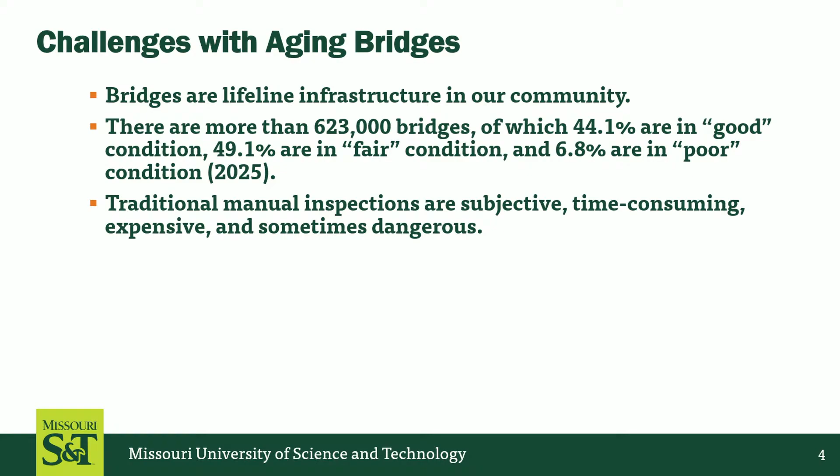I think all of you know the current state of the National Bridge Inventory. We have over 600,000 bridges, but most of them are in fair condition, with some percentage nationwide in poor condition. This means we have to watch this aging infrastructure more closely than when they were new.

Of course, current visual inspection is relatively subjective - even with rigorous inspector training, you'll end up with different results when they inspect the same thing. Even for the simplest bridge, a single span, a Federal Highway Administration study showed you get a pretty diverse range of different answers. So if you use machines, obviously it will give you consistent results in that sense. Instead of climbing around, using a drone is certainly more appealing in the future.

So why do we need automation in civil engineering? I put together 4 reasons. One is physical accessibility. As you can see from the picture, we need a boom truck to access different parts for inspection.

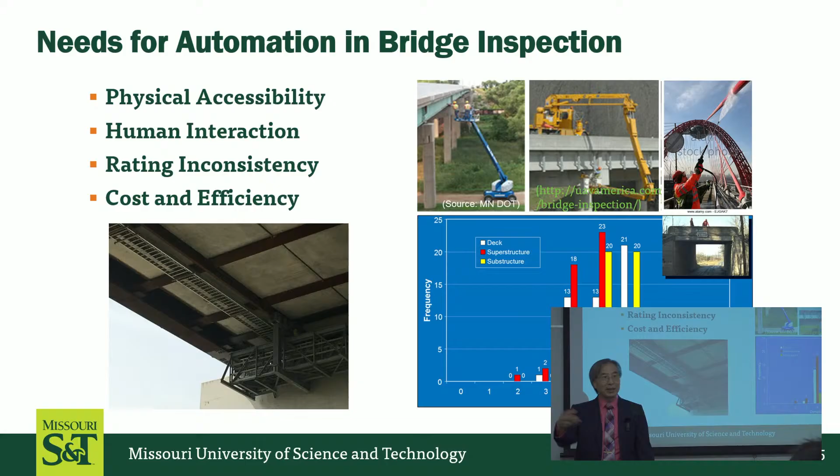In addition, the inspection guidelines require human interaction with a bridge element, in some cases within half-meter distance, because they need to clean the surface or tap around the member to hear it. Sometimes you need that sound to distinguish one potential defect from another. So we need that interaction going on. Within a drone itself, you cannot interact with the infrastructure - that definitely cannot meet the federal regulation if it requires human interaction.

Certainly rating inconsistency - you can see that - and cost efficiency, this picture tells you everything. This is a bridge over the Mississippi River. Underneath this bridge, they built an inspection platform. Mike from Washington knows that very well. For major river crossings, oftentimes you provide that inspection platform because for future inspection and maintenance you need it. It costs $1 million to build this platform itself.

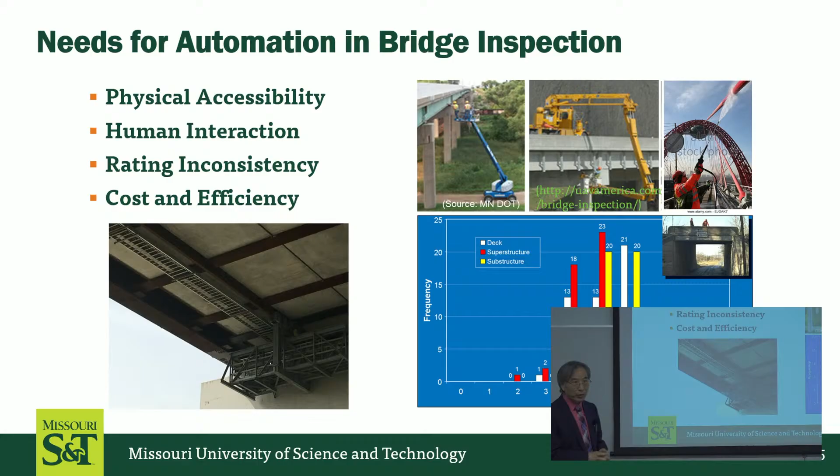And I was joking with Missouri DOT, if they give me $1 million, I'll provide all the robots they need for the entire state's bridge inspection. They don't need to maintain this platform either over time, and they don't have to spend money. So if you do it right, a robotic solution will be very efficient, effective, and cost effective.

So of course we do have a sort of bible for bridge inspection, the 2019 bridge element inspection manual, where all elements are required to have a 4-condition-state assessment reporting. And if you check this definition, it often adds quantifiable data - spall 1 inch or less deep, or 6 inch or less diameter. Using visual inspection and looking at a certain distance, it's very hard to get those quantified data. So if you have a robot interact with the bridge, it's a lot easier to get a consistent result. So all this quantified data - you can guess, but it's hard to get the decent number to fulfill the requirement of this regulation.

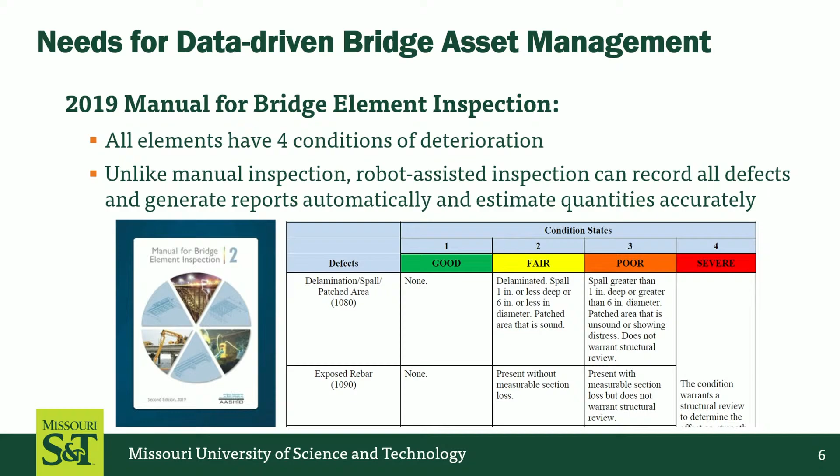So of course there's another issue with manual inspection. Even recording all this information from one bridge itself is also an effort. Manual recording is a significant effort, especially for bridges where you have difficult to access areas. It will be awkward for you to even record things on the way, if you have to climb somewhere on the bridge. So all this, if you can generate it with a machine, you can automate the process. It will be very efficient.

So our solution is automated inspection, mainly 4 steps: data collection, defect detection, quantification, and condition assessment. We will go through each step in this presentation, but I encourage you to ask questions so I can always elaborate more when there are unclear remarks.

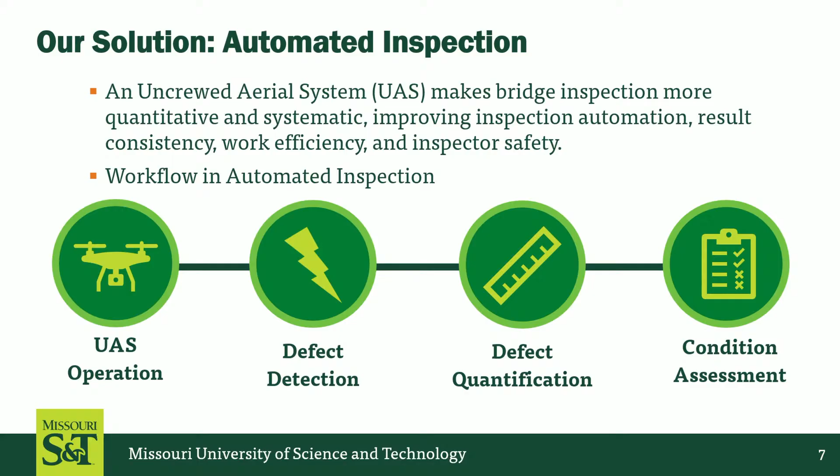So obviously we will use an unmanned aerial system, combining drone, climbing robot, and sensing system to make the inspection more quantitative and systematic in that sense. We can improve not only automation but also safety for the inspector, because you are working on the ground instead of climbing or hanging somewhere on the bridge itself. So that's the difference for an automated solution.

Again, to give you a little more detail for each step, you can easily understand the different steps. These are 3 steps, and step 4 is the key part of this presentation. Basically it's easy to understand: using UAS to collect data, then automatically extracting video frames using AI, and then segmenting both bridge element and defect using multitask machine learning.

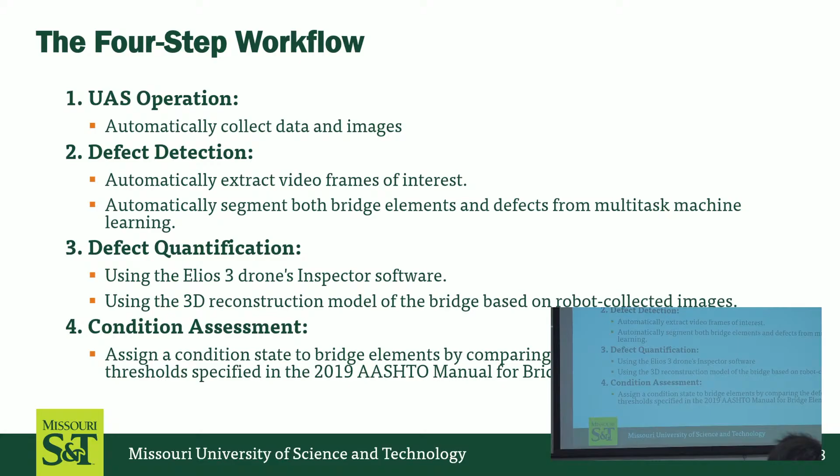Because when you're using a drone or our robot, you collect tons of video and data. Asking engineers to sit in front of a computer and sift through those images is impossible, and it's also very boring - not a good use of time. So instead, this is a perfect opportunity to ask AI to pick out, let's say, 50 to 100 frames from 2 or 3 hours of video, so the engineer can only evaluate those 50 or 100 frames for interesting features. That would be ideal. In that case, the AI doesn't have to provide very accurate results, as long as it picks up the most interesting part for the engineer to review. That's a good use of AI for that.

And then to quantify that, obviously, this is another part. Using visual inspection, it is very difficult to quantify them, especially with remote access. So using the digital technology, we can quantify the dimension and the size of a defect. It's relatively easy. Sometimes you have to do 3D reconstruction, which takes some effort, but typically, once you develop a 3D model, you do not have to redo that every time. So you just need to do that once, for example.

And then, of course, we will compare whatever image we collect with the 2019 manual for bridge element inspection, and we can use graphical comparison or other comparison to determine the condition state much better than just a human looking at the bridge and saying condition state 3 or 4. Because you can quantify the correlation between what you see on the actual bridge and what people put into the guideline as a reference.

By talking about that, there's also an opportunity. We can also evaluate whether the images put in the 2019 manual are reasonable or not. Because those are picked in an ad hoc, sort of arbitrary way, they may not be so scientific, even though we put the category 1, 2, 3, 4.

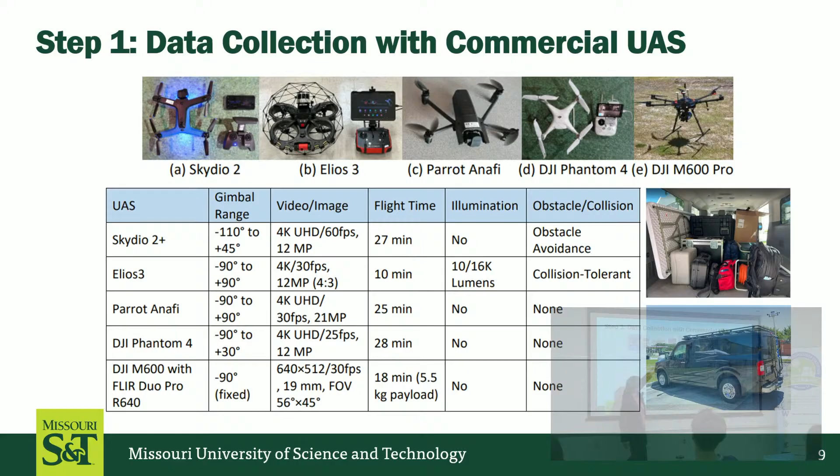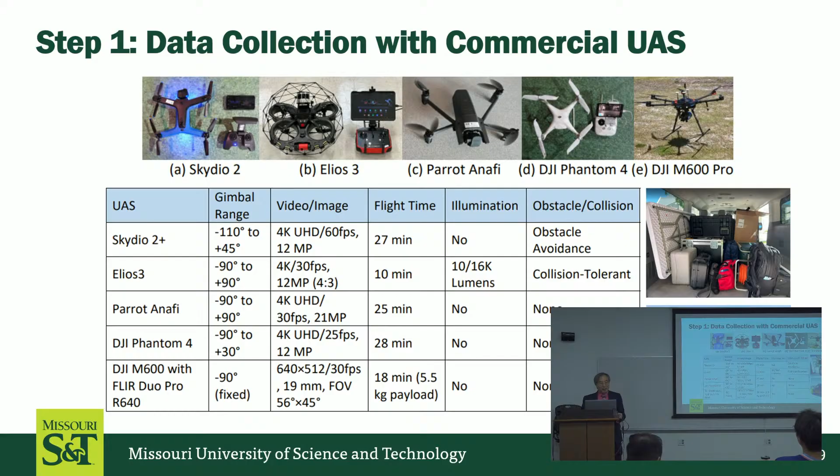So we also have a set of commercial drones we acquired, and the last one we actually developed specifically and then asked a vendor to build for us only. So we have a suite of commercial drones. These are nothing new, but we use the Skydio 2 and the Elios 3 quite a bit. This is made in the US, and that's made in Europe, in Switzerland, I think. We use the DJI drone quite a bit as well, but since last year, we began to use the DJI drone less and less because some clients specifically ask us not to use the DJI drone.

But we focus on our own robot system. As I said, the commercial drone does not give you an interactive feature with the bridges. And some of this feature interaction with a human hand is required in future inspection. So the only way we can satisfy the federal regulation is to create a robot that enables us to interact with the bridge directly. And we do that in two senses. I'm going to jump into this one first.

For example, this drone can fly underneath the bridge girder, grab the girder, and then just hang on there like a driving vehicle. I'll show you a video very soon. Once you engage with the girder, this is no longer a flying vehicle. You can turn off the propeller and then just move, traverse linearly.

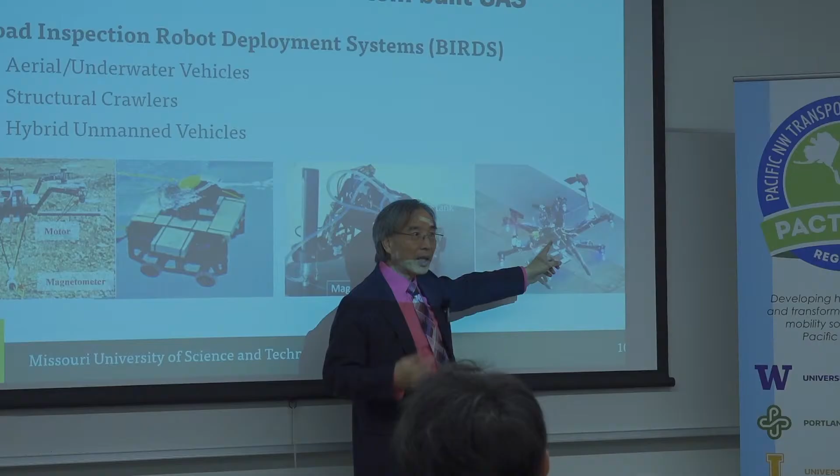So when you do that, there's a lot of benefit. The most important benefit is that it's no longer like a commercial drone flying around. You will sometimes be moving around because of wind or whatever reason, or the illumination light condition is not consistent. You have a shadow, you have others. Once you engage here, all those problems are gone. So the data we collect is very, very high quality and consistent.

But more importantly, this guy can carry a palm-sized crawler, like this one. Once you engage on the girder, it can launch this one onto the girder, and this guy can move around on the surface of a structural member to inspect corroded areas, connection areas, bolts, or whatever other feature you are interested in. So together they can cover almost every area you are interested to inspect. That's the purpose.

And this can do not only visual inspection using a camera, but also non-destructive testing. This is an ultrasonic velocity tester for metal thickness measurement. And this is a probe. We also have a fully submerged underwater robot, an ROV. We also have a surface water vessel to carry sonar underneath to survey the bridge scour problem area as well.

And this is one where we developed our own drone with a magnetometer to communicate with the so-called smart rock. The concept of smart rock is a sensor put inside a concrete ball, and you deploy this concrete ball near the bridge pier where bridge scour is potentially happening. As the scour happens, creating a hole more and more, this smart rock will roll into the bottom of the hole. By communicating from the drone, like 5 or 6 feet above water, with the smart rock, we can identify the location of the smart rock in real time, even during flood season, when you cannot send a diver to do any inspection.

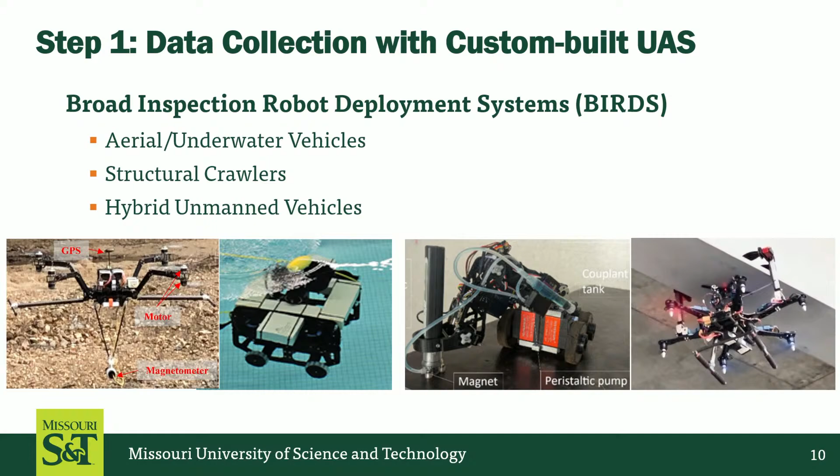We can use this. In 10 minutes, we can collect all the data we need to assess whether your scour hole is increasing or not. And that data is very critical for DOT to make a decision during the flood season, for example. So we do have a combination of aerial underwater vehicle, structure crawler, and the hybrid vehicle. And I'm going to show you some video pretty soon.

Luckily, like Professor Wang mentioned, we won the 2025 ASCE Charles Pankow Award for Innovation for this one. And they quote, "This is truly revolutionizing bridge inspection in an automated way, leveraging AI and the drone technology." So you can see this is what we submitted to ASCE actually.

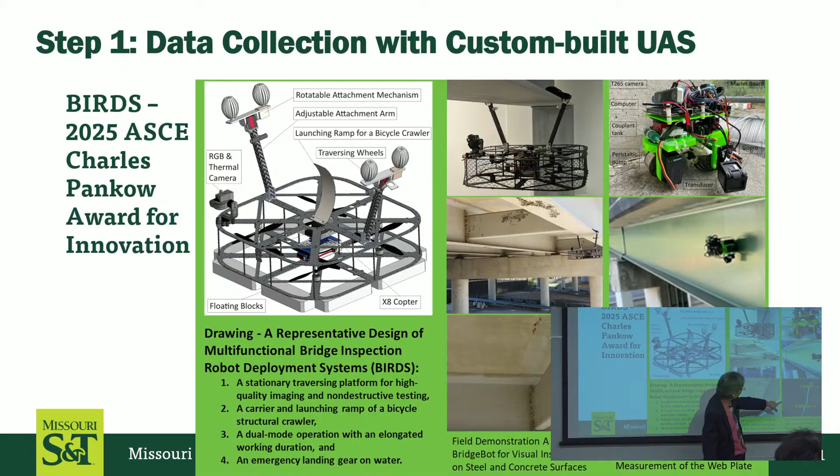This is the more finished product hanging, and then for this inspection, you can launch the crawler for this real in-service bridge. For inspection, you can automatically, in real time, display the thickness of the metal, like a girder web side, as the crawler is moving around. And you can also see visually the surface peeling of the coating area. And all this can be quantified in an automatic way.

And this is an image I just received yesterday. So I put that in. That's from the US DOT presentation I've been making, the impact of a robotic solution. Now, you may ask, why a hybrid robot? I summarize here: increasing operation time. Flying versus traversing, the consumption of battery power is in a different order. If I can fly 10 minutes, I can use that same power to traverse for more than 1 hour. So this will make these technologies more practical for real civil engineering inspection, using crawling and flying capability together.

Second one, as I mentioned, you can create a measurement station. It's very robust. Third one is easy navigation, because instead of flying 2D or 3D, we are moving in 1D basically. And we also get accurate positioning. If you are familiar with a surveying wheel, if you walk around, you can measure the distance from the beginning to wherever you are. We can use a low-tech surveying wheel to measure the distance from the end of a girder to wherever you are inspecting. That way it's easy for DOT to use. Forget about GIS and other referencing you have to learn. By saying the distance from Pier 3 to this inspection location is 20 feet, any bridge engineer will easily know that. So it's easy to connect with practice as well.

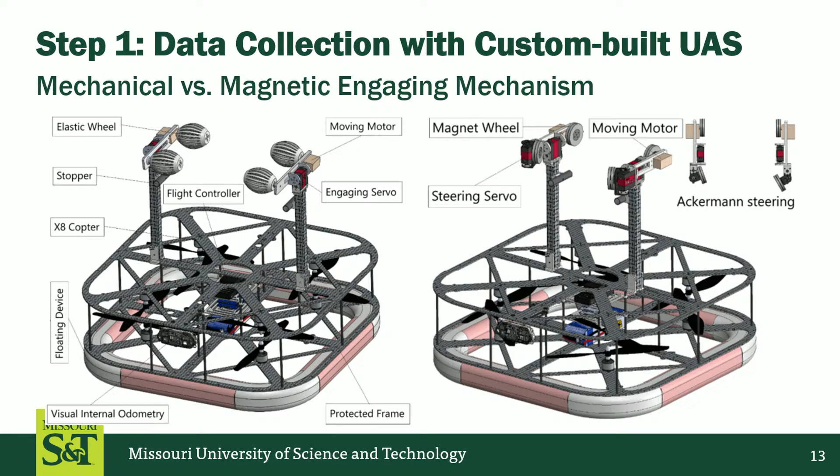These are the two mechanisms we created, mechanical and magnetic engaging mechanisms. The one I showed earlier in the picture is mechanical engagement. This is good for both concrete and steel girders. And this magnetic wheel is good for steel girders, obviously. I will show you a video pretty soon, but this is another summary of what you saw already. This is the initial standby position, this is operation, non-destructive testing, and this is the control system we have.

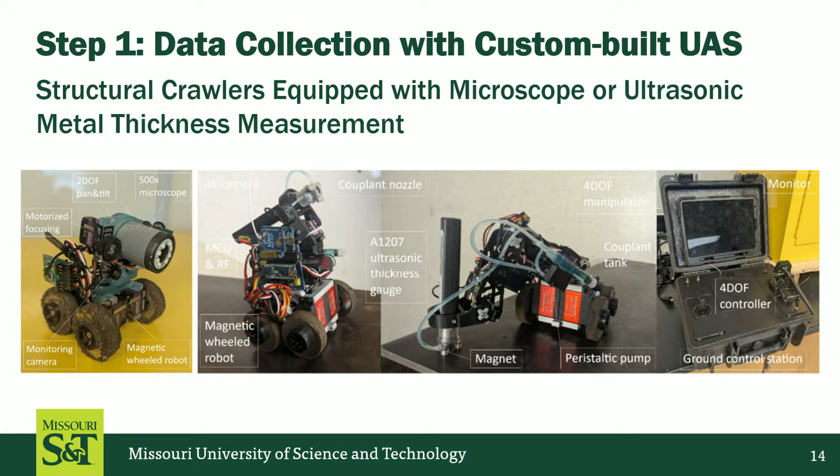And we also have another crawler using magnification, like a mini camera. You can magnify things 500 times, 1,000 times, so you can do visual inspection remotely, basically. If I give you the video, you will see. First of all, the engagement of the drone with the girder. This is a real bridge in the state of Missouri, flying to engage this girder at the bottom flange, and from there just moving around in one dimension. When you turn off the propeller, it can save a lot of power.

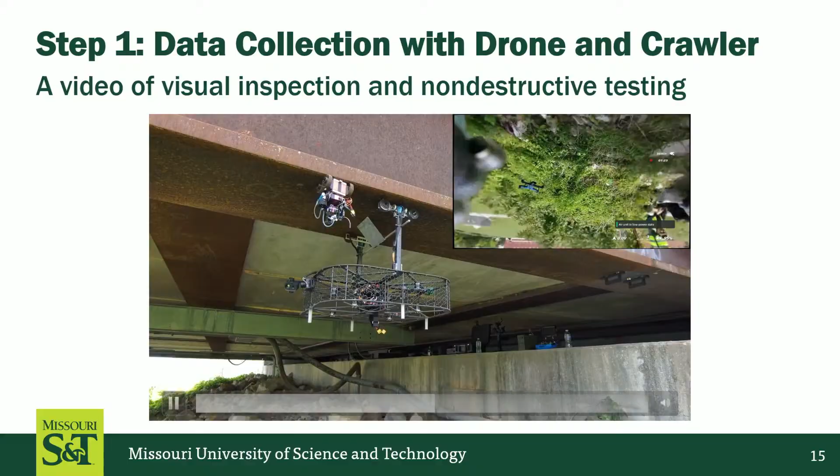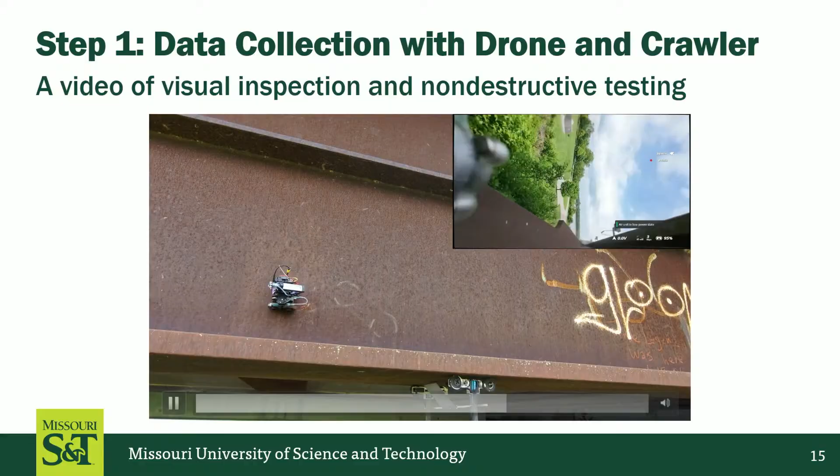The second one we tested on a river crossing bridge, a cable-stayed bridge. You see the launch of this crawler, and then you can see it moving around, and it can carry the camera. I'm using another Skydio 2 drone to shoot this video, so you can also see the Skydio 2 occasionally. You can move around to different parts of the bridge. If you are interested in collecting more data in a certain area, you can just move over there. And very soon you will launch the probe I was talking about to measure the thickness. This is ultrasonic technology. You can show directly on the screen whatever measurement you have, in real time as you go.

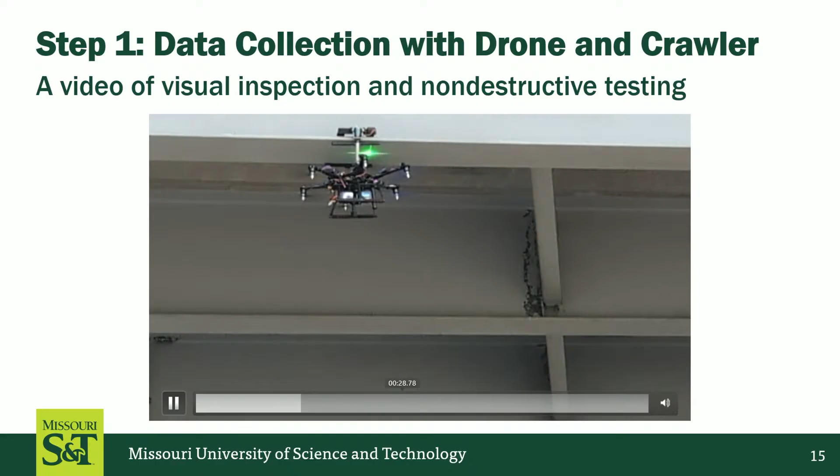So that's basically it, if you want to take a quick look again, because this is one of the unique capabilities we introduced. At the time we began to work on the bridge, this was the only one in the world that could do it, actually. So that's why we got the patent and the AAC award on this technology.

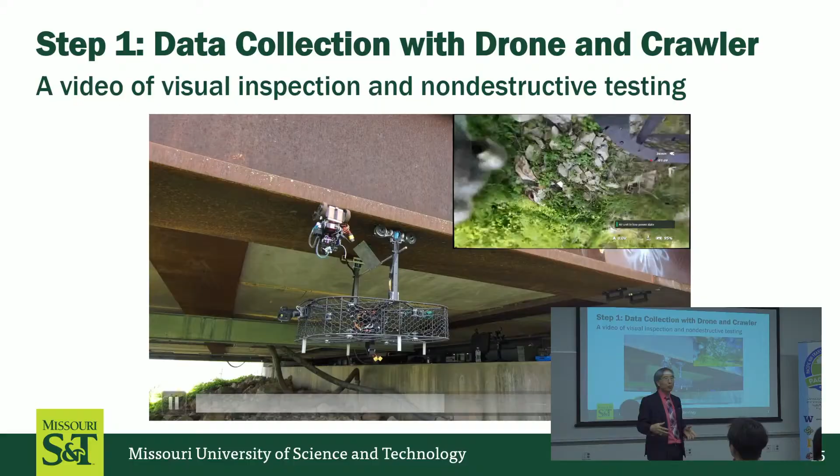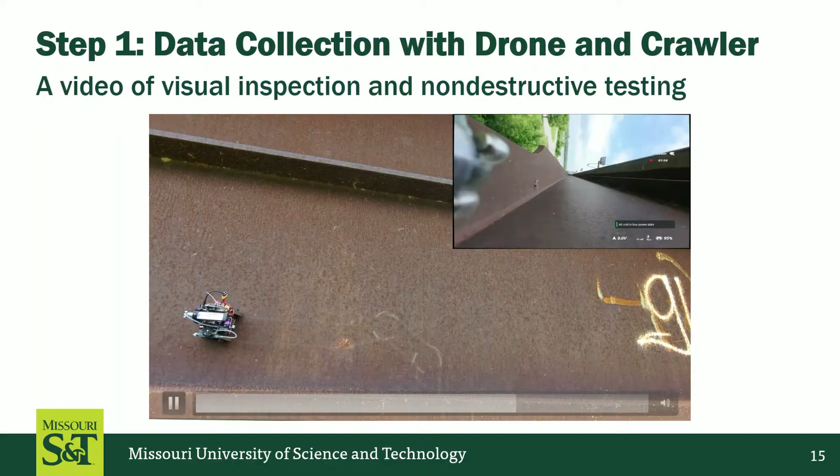So again, one of our goals is to push this technology for inspection of long span bridges. Because if it's crossing over water, it's a lot more challenging to inspect manually. And for these things, it doesn't make a lot of difference whether it's on land or over water. So it's very, very relevant to bridge inspection in this sense. So this one is showing the highway bridge and the river crossing bridge.

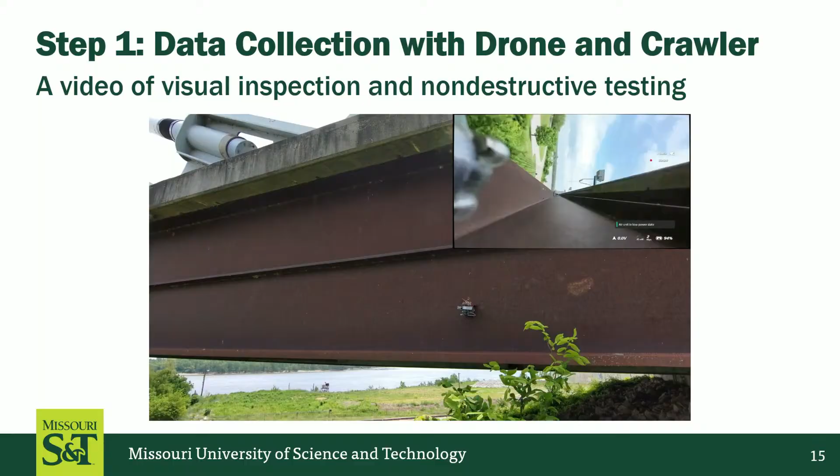Next, I also want to show you the real-time weld inspection capability as well. But before I do that, we're also involved in manual inspection on a real river crossing bridge. This is my team doing all this non-destructive testing manually on the pier. So in the future, we hope, and we are actually beginning to work on this, to create a water surface vessel that can do all this automatically instead of sending people to the middle of the river to do this.

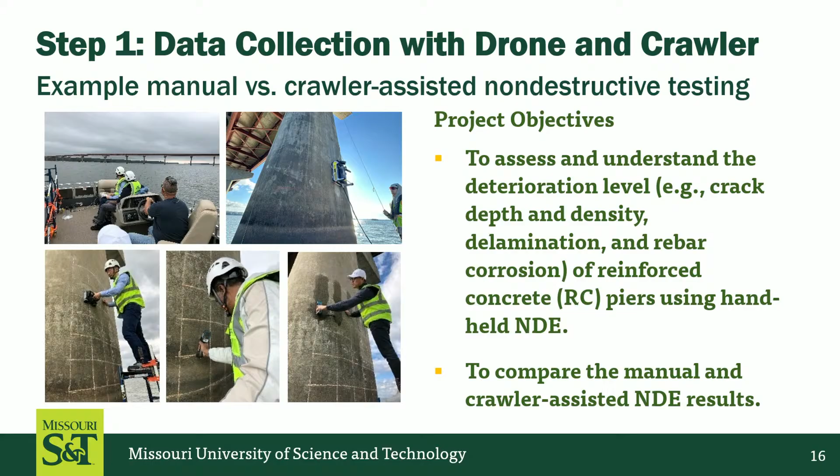As a matter of fact, the challenge is the water is always moving so much. So we have to take advantage of this control technology, and also create a creative way to make sure the non-destructive testing part is stable. Otherwise, you cannot get a nice measurement. So that's the experience we got from field operations with our clients.

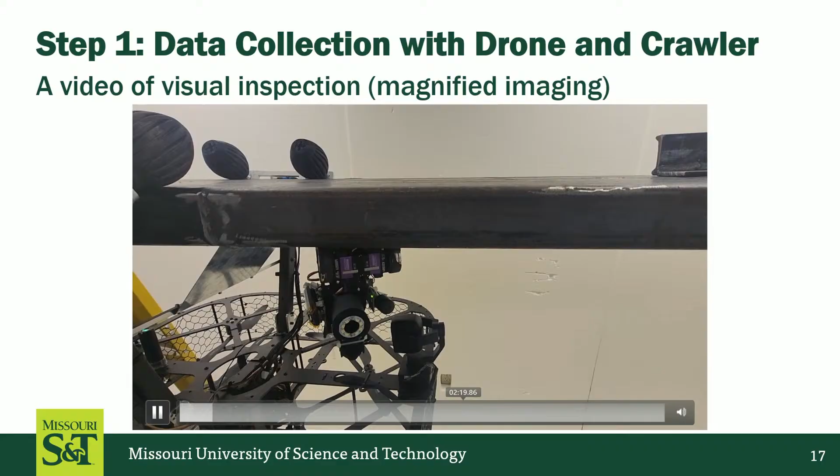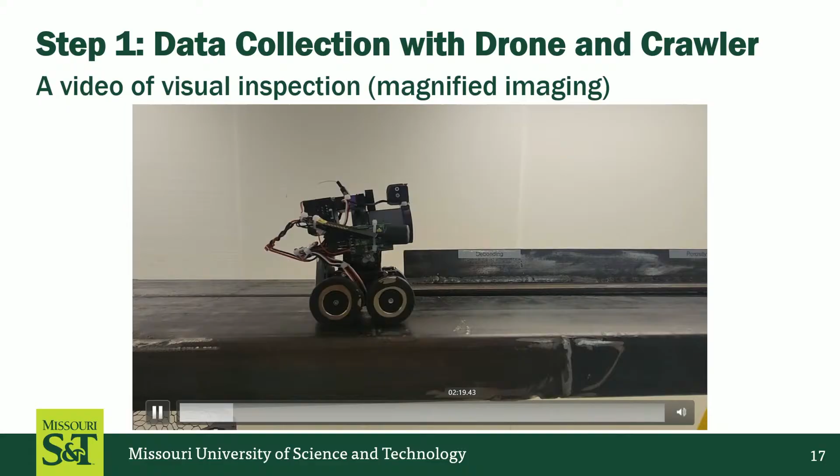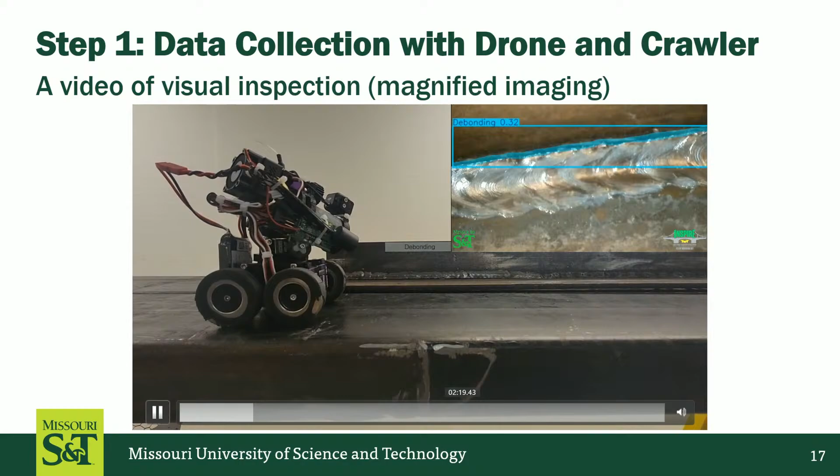So this video is showing weld flaw detection, and this is the demonstration in the lab with a metal structural member. It does take a little bit of momentum because the crawler has a certain weight, so you need to move at a little bit of speed to get over the gravity effect. You can see we have prepared the weld specimen. As it moves, it can provide real-time detection of weld cracking, debonding or cavity in the weld. And of course, there is a pre-trained AI built into the robot.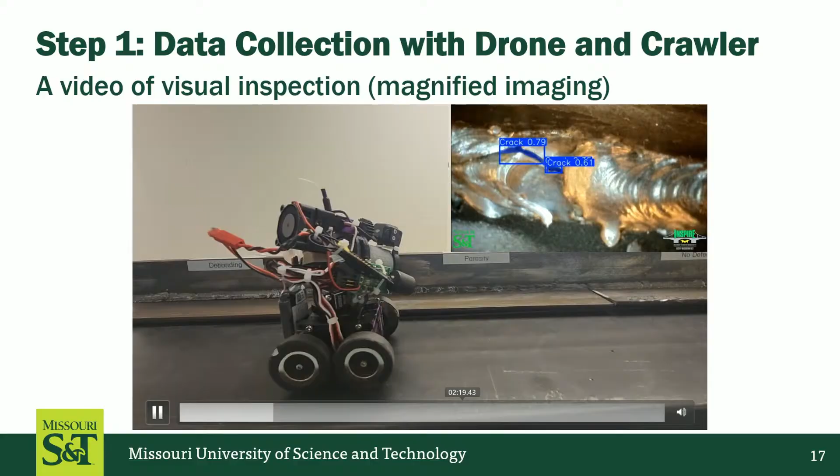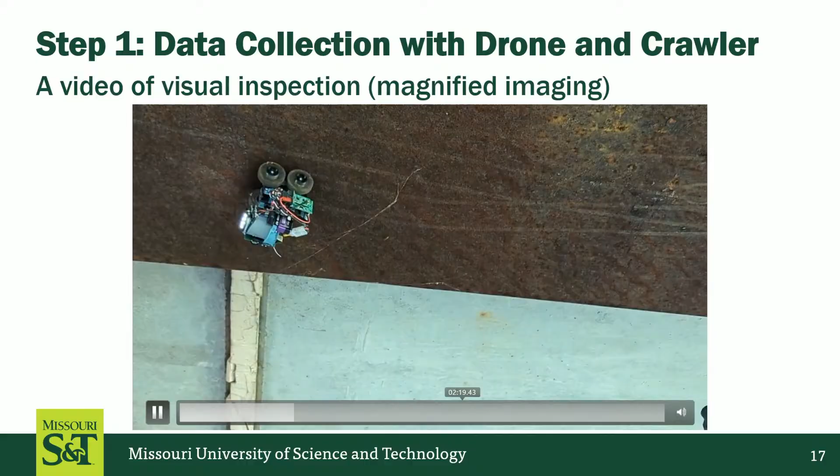So once you take a new image, it can automatically spit out. You have this is a crack at a confidence level of 79% or whatever you have. If you are working on AI, you know this is based on instance segmentation. You only have a confidence level. You do not have accuracy because you do not have ground truth to compare, right? So if you're working on that, you know that.

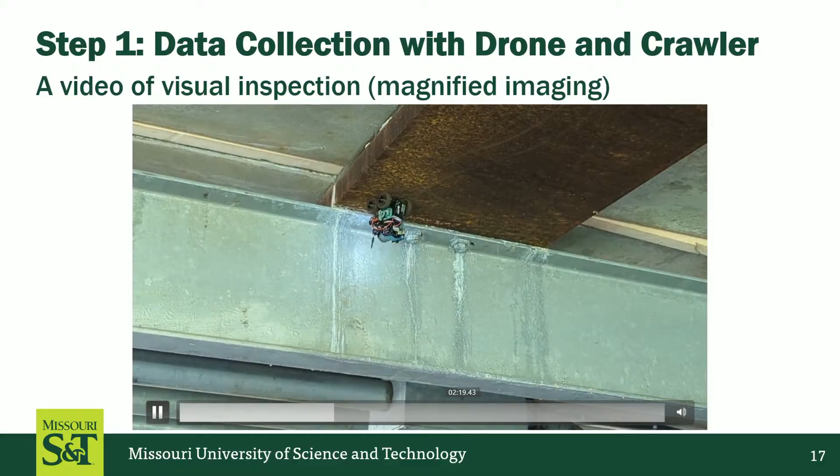And especially this capability is good in the crowded areas where you can never send people in. So this is a river crossing bridge at the anchorage area. There's no way you can send any engineer close by. But this guy can go anywhere. It'll show you in this video very soon, at the last part. And if you want to see if there is an egg in the bird nest, you can also see that using this.

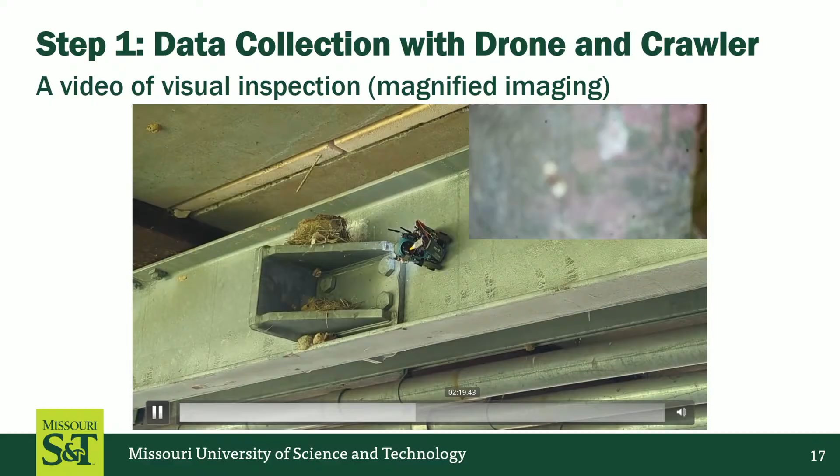So this technology itself is very good. Of course, it takes an engineer to plan the mission and do some meaningful task. These are just tools; AI and robots are all tools. So we have to make good use of them. And now I'm showing you some live feedback. You can see the fine grain of the texture on the surface. The camera we put on has a 500 times magnification factor, so you can see it in great detail.

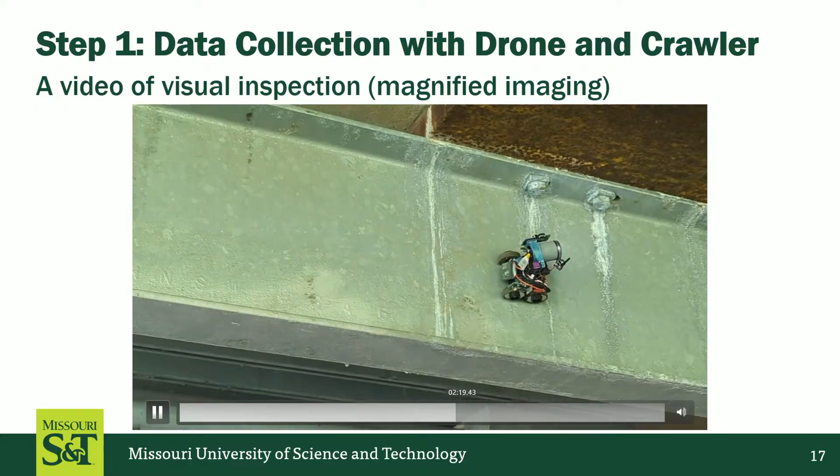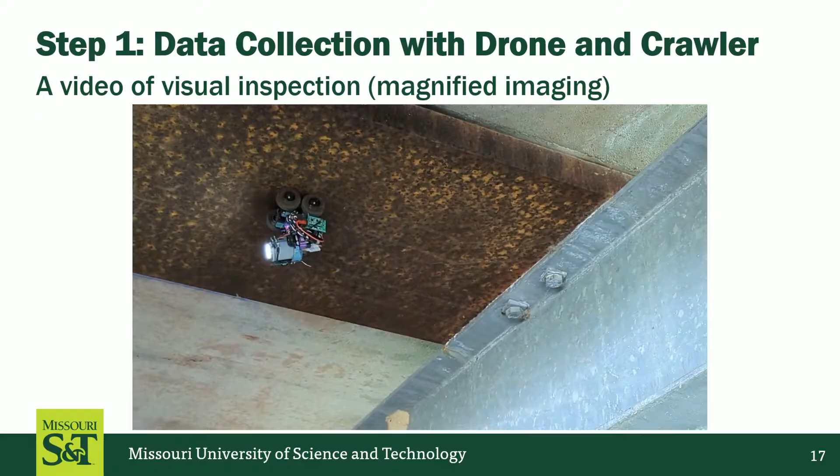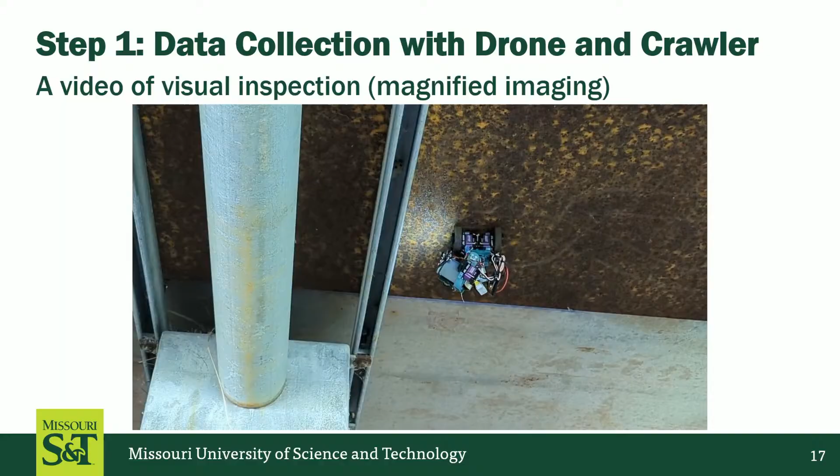So for PhD work, the value is not how to build this thing. The value is how to use the data, or planning the task and then using the data. That's the real value for PhD work. It took me, my research engineer and postdoc a lot of time to design this unique robot. But I never asked my PhD students to do that because they have a firm deadline for graduation. They have to publish papers, for example.

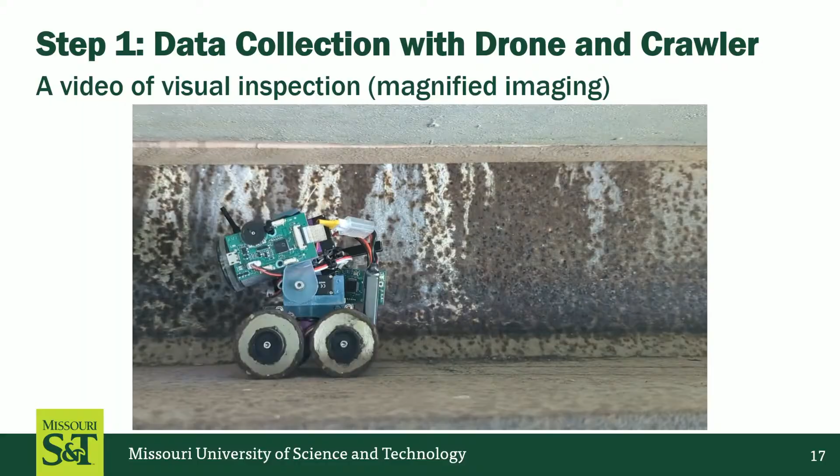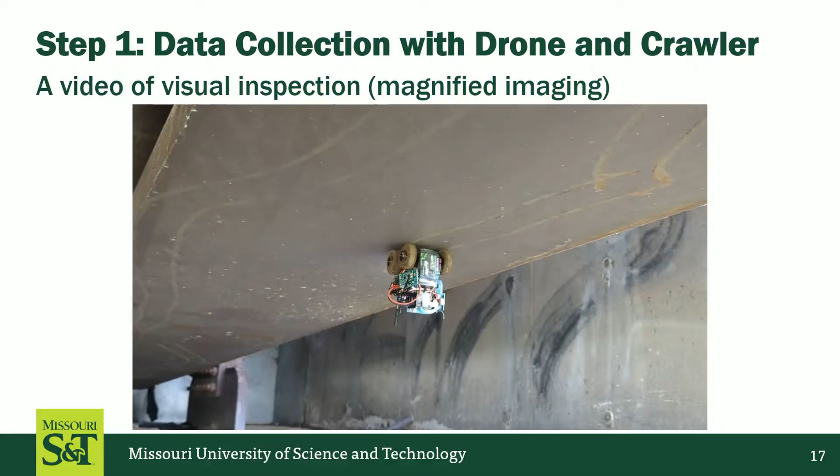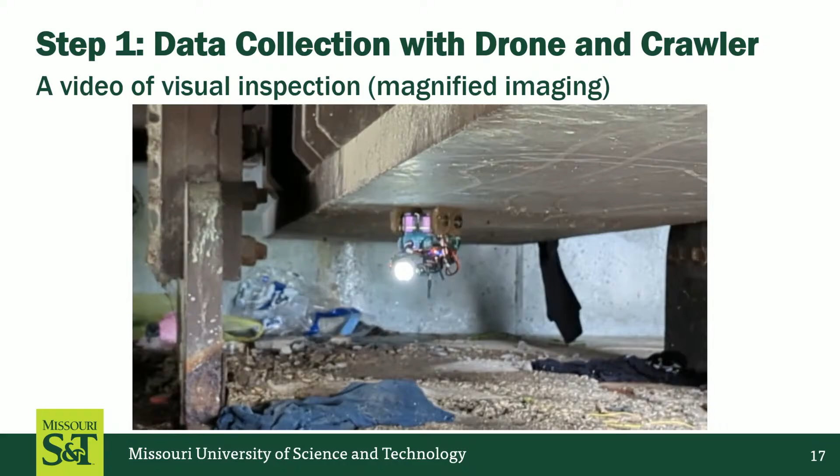So this is the retrieval of the crawler, and this is probably going to the anchorage area. You can see it's a very tiny space they are walking on, and to the anchorage area very soon. Yes, this is going to the anchorage area. You can see it's actually a tiny space over there, and it's all kind of a jungle. But this guy can go anywhere, even between two stiffeners over here, where you can never see. It can send back real-time images, actually.

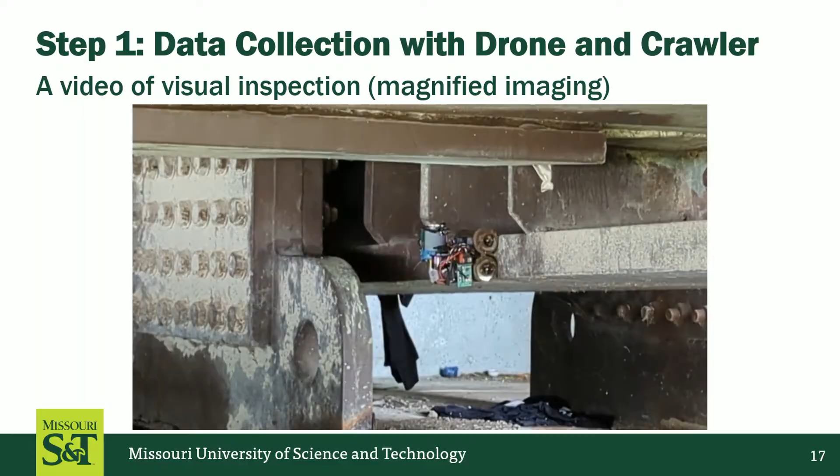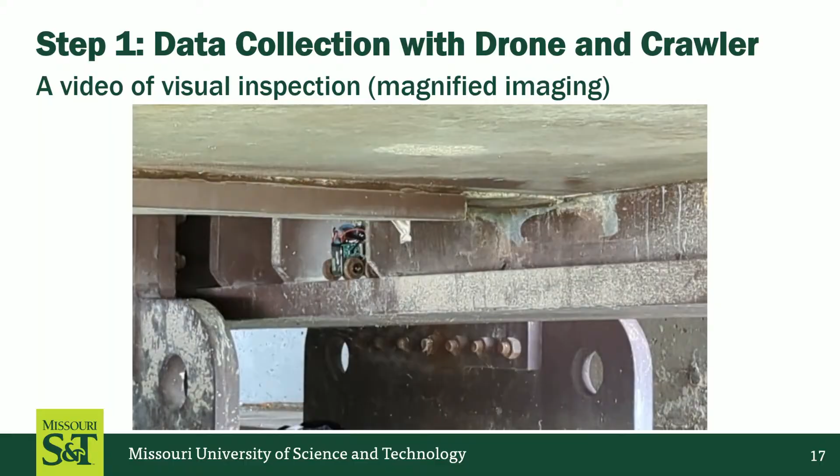See, it goes between the stiffener. So you cannot see the crawler itself visually even. So we basically demonstrate this really nice tool for us.

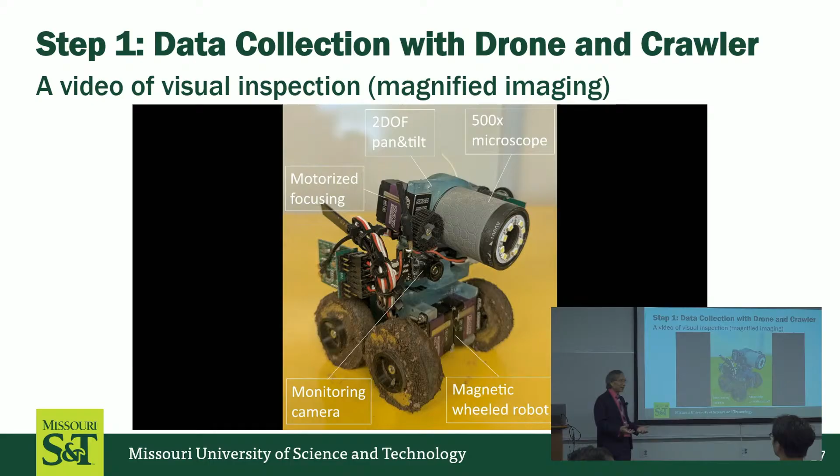How do you control it at that point? What's controlling it so that you can get it in between the two stiffeners? Have you ever played a video game? No, this is just like a video game. I'm sure your kids will play this one, operate this very much. Okay, so you've got a camera and you're just controlling the video game basically.

Okay, yeah, we have a feedback, live feed of the video.

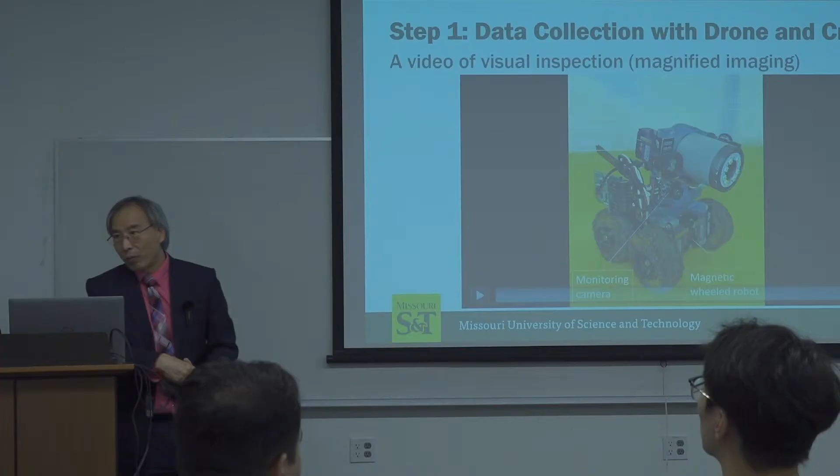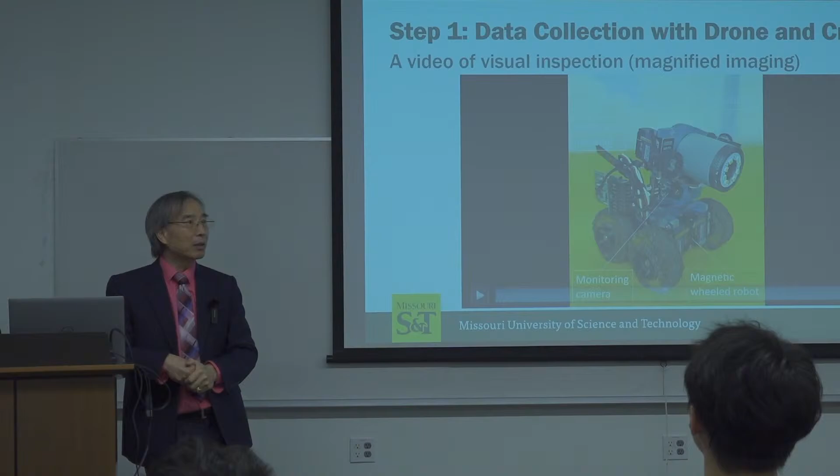So what's the communication range? We didn't test to quantify that yet, but typically within 1 kilometer is not a problem. We haven't tested the extreme maximum distance yet. That's something I hope we will test on the real application case. The current technology for this local Wi-Fi, 1 kilometer is not that challenging. Certainly, if you have an intermediate block, it may interfere a little bit, but we tested over many buildings, even 1 kilometer is not the issue. We can still make it work, even beyond the visual line of sight, but we haven't formally quantified that yet.

So which protocol did you use for the communication? That will be my team member, probably have a better answer for you. I'll let my student answer that if you're interested, because I don't want to give you the wrong one. So we tested a few of them.

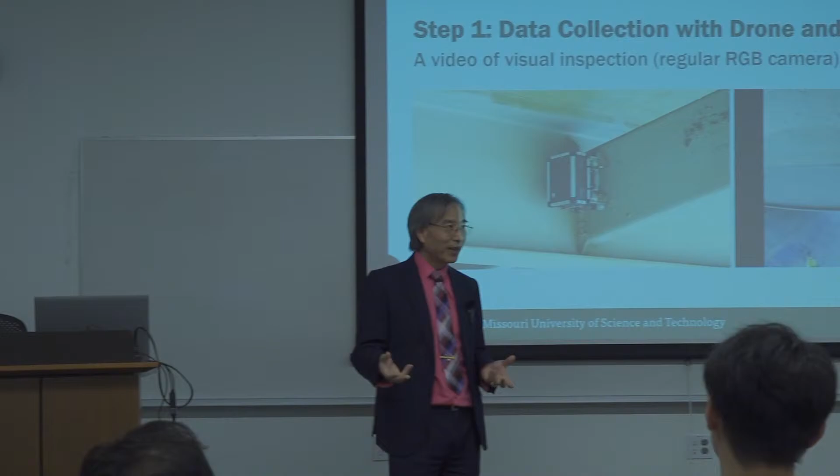For example, we're using LoRa. You're probably familiar with LoRa, right? We're using that, and we tested it can reach up to 1.7 mile range, not a problem. If we have to go farther away, we will have to use an amplifier. So I think current wireless technology within a kilometer is not a major challenge anymore.

So LoRa is one kind of device technology we use, but we're also using others. So this is showing you a video, like a solution with a big crawler. This crawler is 40 pounds actually, it's pretty heavy. You can carry a decent computer inside there if you want to, with a lot of power for real-time processing.

This can show you all the detailed image from this movement at the connection area. So let's try one more time. You can see the peeling off the paint. Mike, we're talking about quantifying the corroded area, the deterioration. With this information, we can easily automate the process to quantify them, basically. You can see the quality we did is so well. If you fly a drone 6 feet away, because they're oftentimes hiding behind something, you have different levels of light illumination. The quality, I guarantee, is not as good as this.

So the next step is that we have to detect the defect, and as I mentioned, we're using AI to do this job. In particular, we developed a multitask AI, meaning we detect the type of element, bearing, deck, abutment, and the type of defect, crack or corrosion area, at the same time. The benefit of multitasking is to enable you to get a well-performed AI much faster, much more robustly, and also more accurate, because the AI can take the information from element and defect in some correlative way once you train that together.

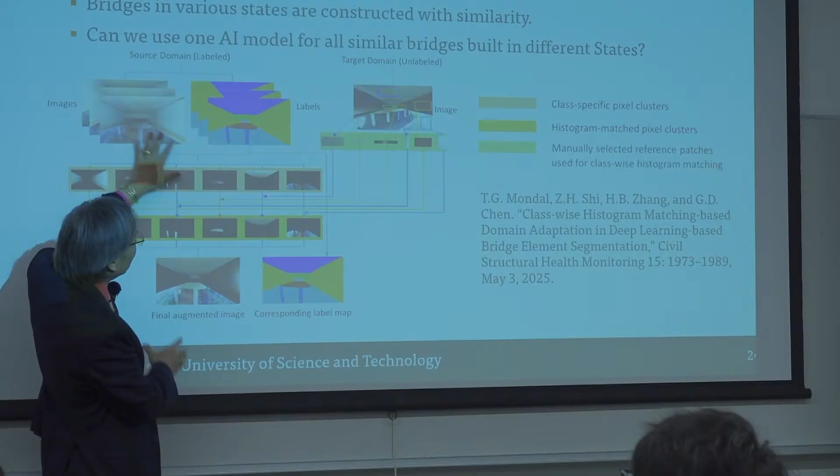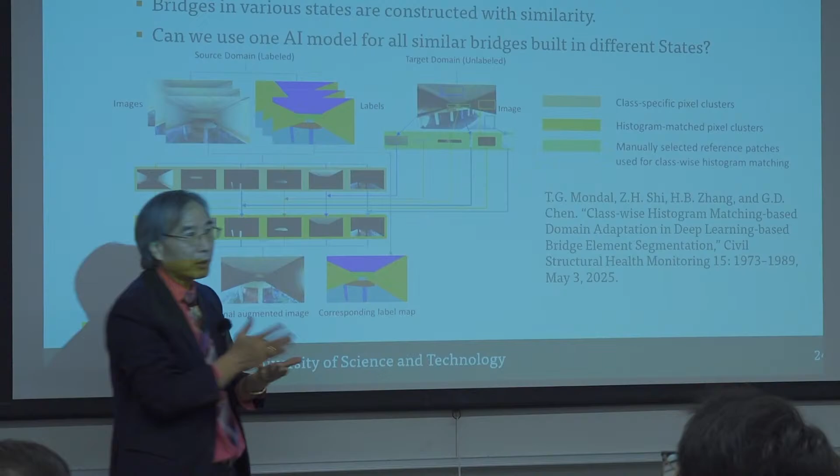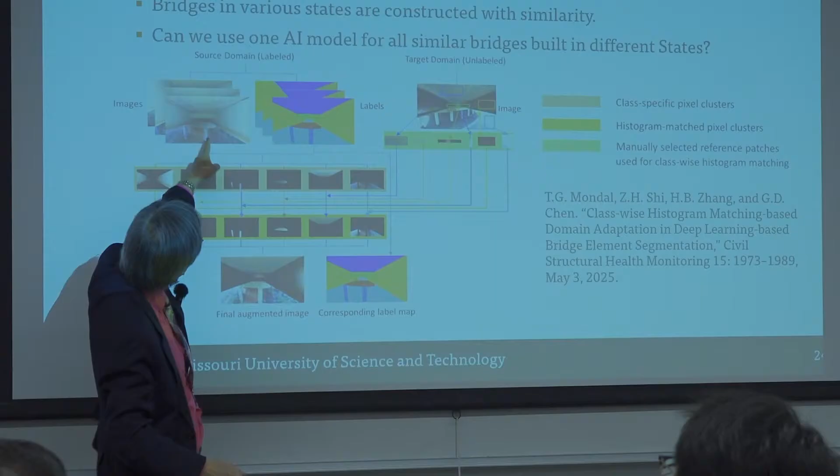The way we did it is we take some representative patches of image and compare them to analyze their color distribution and make them match, so we can create the equivalent bridge image for this bridge, not this one. So we can augment the bridge image this way, and using the same labeled data as before, you don't need to recreate the labeling. If you add these two as a training pair, you'll be able to adjust the prediction—that's what we do with mixed data, because this part doesn't need to be supervised or labeled.

This part you do need to supervise with label. Okay, this mix has a minimum effort to achieve the extended service for bridge element and defect detection. That's the concept behind that. Now, how effective it is, and this is how we implement this.

Instead of a traditional approach, you have image label data with a segmentation loss minimized to create the AI model. You add another one, so-called adversarial loss. The idea is to ask the AI, while you are predicting this bridge, at the same time minimize the difference between the Virginia Bridge and the Wisconsin Bridge through this adversarial loss. Here you do not need additional label data, so it's minimum effort to achieve that.

This is what we call class-wise histogram matching UDA, so HMUDA is our approach. There's a conventional UDA in the computer science community. Or if you compare with not doing UDA at all, that's actually the original one.

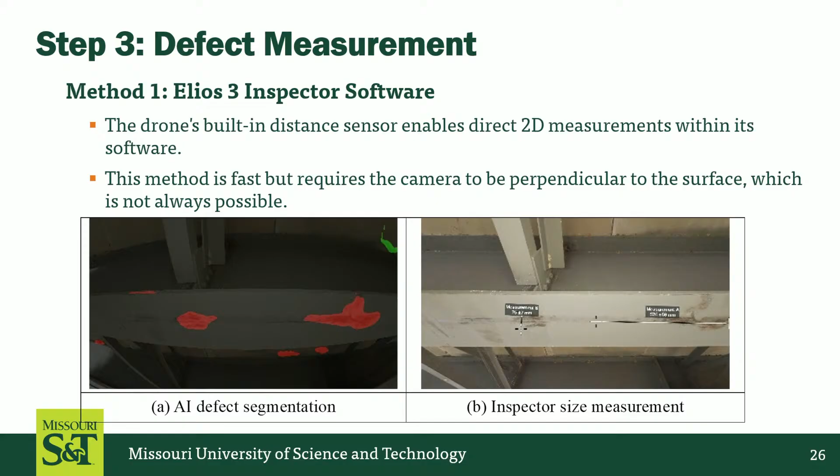Defect measurement is nothing - it's quick. If you're using the Elios 3 drone, it comes with software called Inspector that allows you to do some quantitative measurement from images like this, but it only works for some images. When you have the image perspective camera to the structure member almost perpendicular, you can get that measurement. If you have 45 degrees, you cannot get any information because the automatic measurement distance is not so accurate. They didn't provide that because Elios 3 carries a LiDAR together with RGB, so you can measure the distance.

But the other way to do that is structure from motion. You're probably familiar with this if you're working on AI things. You create a 3D reconstruction of a bridge based on two-dimensional images. For example, here is a tie point - which means if you fly several times, you're trying to put them together. And that's one of the most challenging tasks.

For buildings, computer science people always publish papers on building interior situations - it's easier because there's no setback, no limited occlusion. For bridges, there's a lot of elements hiding behind another element, and the lighting situation is totally different. It's a lot more challenging, believe me. So we spend a lot of time on this.

Even though you have two flights, you're trying to find the common points both flights involve. And if you pull those points out, you will have a sparse point cloud like this. So once you have those points, you can back-calculate the pose of the camera. Once you know the pose of the camera, you can reproject a much denser image onto the 3D. And then once you combine with the 2D camera image, you can get a complete finalized texture, like the original real world.

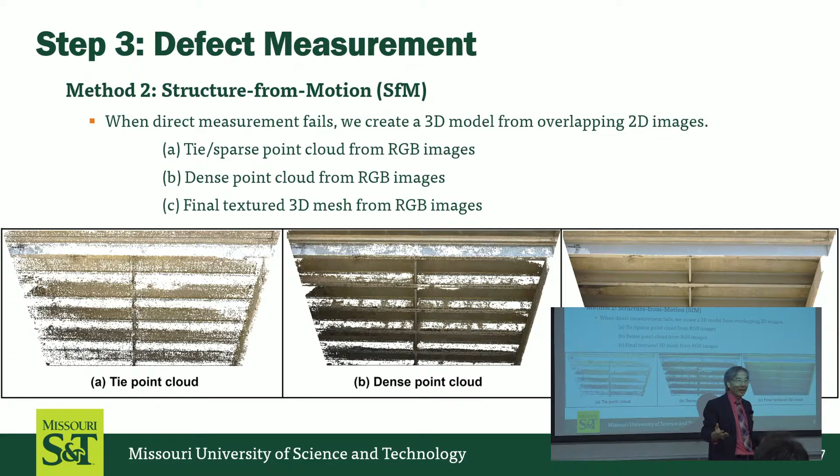This is like a replica of the real world. You can inspect this anywhere, any time, by anyone in the future. With that, these are basics for digital twin in the future, basically - it's the 3D reconstruction.

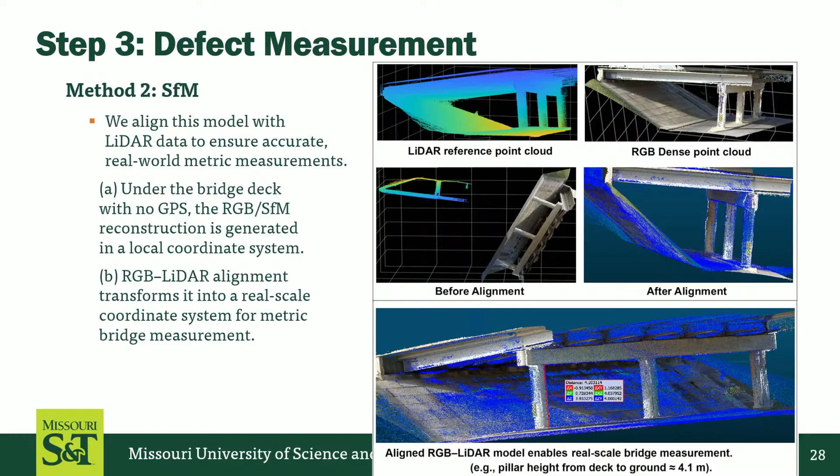Now, this is another one. We can integrate and fuse the LiDAR data with RGB data, which even enables us to measure, because LiDAR data comes with three-dimensional georeference information, so you can measure any distance on the surface at any time. We haven't shown you the cleaned up surface with RGB texture and measurement yet here, but to show you the concept, by merging the LiDAR point with RGB, you can not only know the texture on the surface, but also measure the surface distance.

Here is a comparison of the accuracy of this measurement - it is very accurate, within 3%.

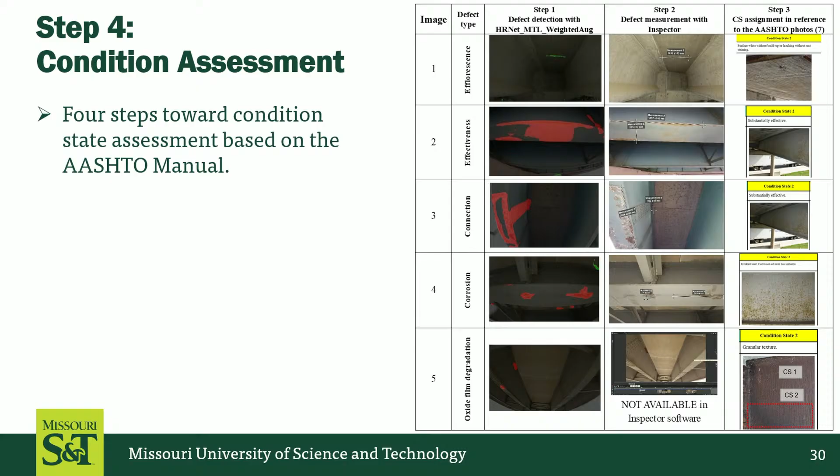For condition assessment, finally you compare with the specification. This is an image from specification. We compare a certain area, compare this image, and make a decision - that's more quantifiable than the totally subjective human call based on the visual image alone. So this is a measurement of size. Sometimes the Inspector software doesn't work.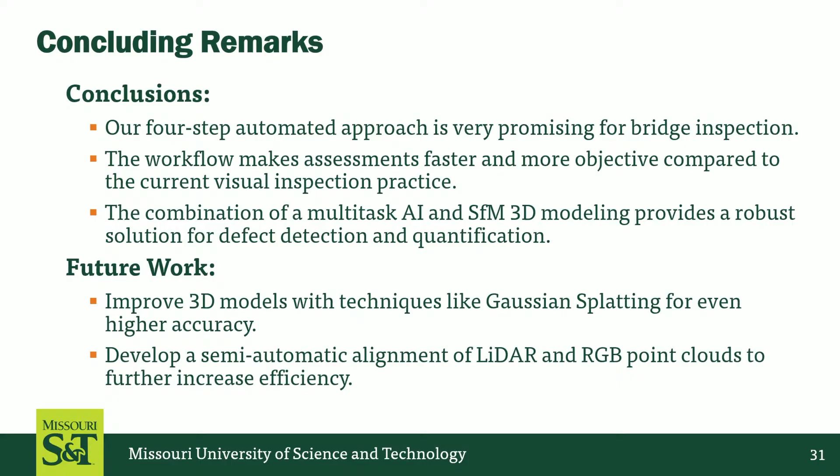In the future, we would like to improve a little more, actually, based on what we are doing. This was starting last year - we are already working on this.

I have to thank the US DOT, even though the grant finished last year, it still trickled down the technology we have developed in the past 8 years. We also have a pooled fund study from 7 states to support this work. With that, I can answer all the questions you have. Thank you.

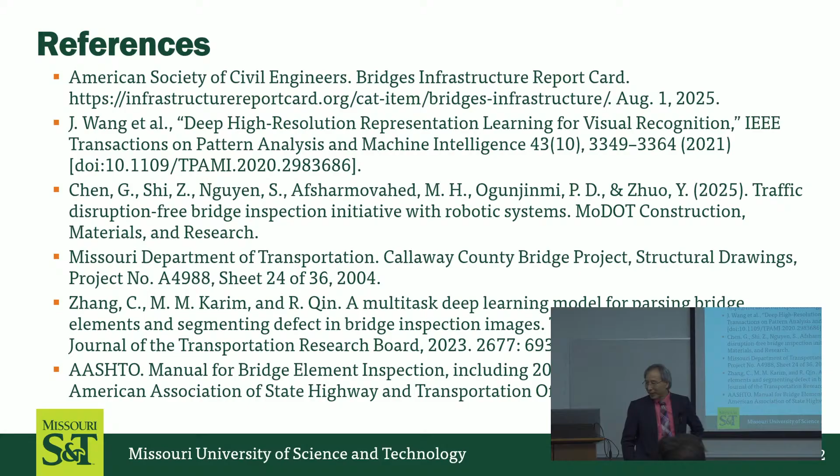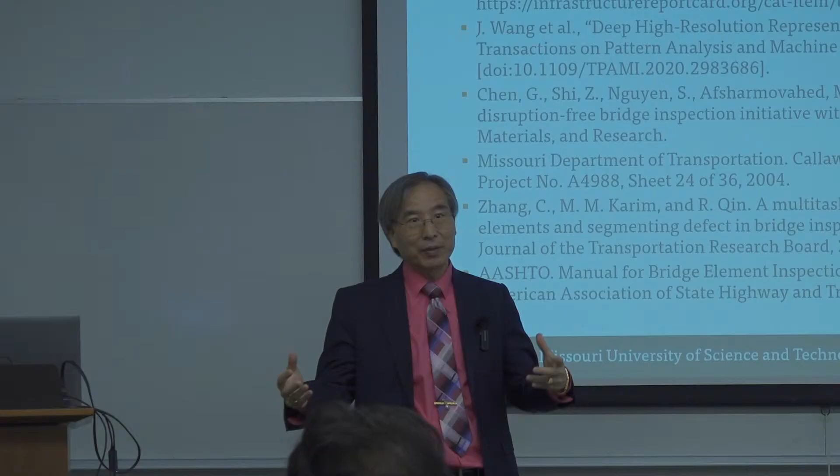That was awesome. My first question is, does this technology generalize to concrete structures also? I was showing Mike a picture, we have this hanging drone on a concrete girder. Because it's a mechanical clamp, it's the same, you just need to tailor it to that concrete situation. Most of the time we spend on the steel bridge, but it's the same concept. We demonstrated on the concrete girder also.

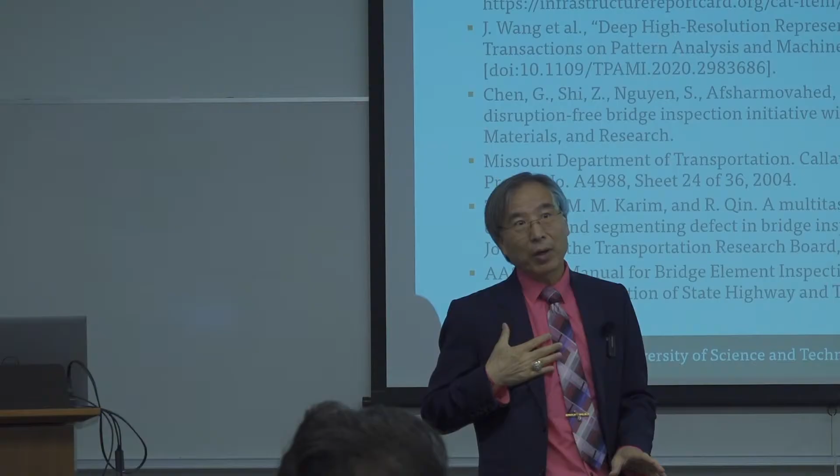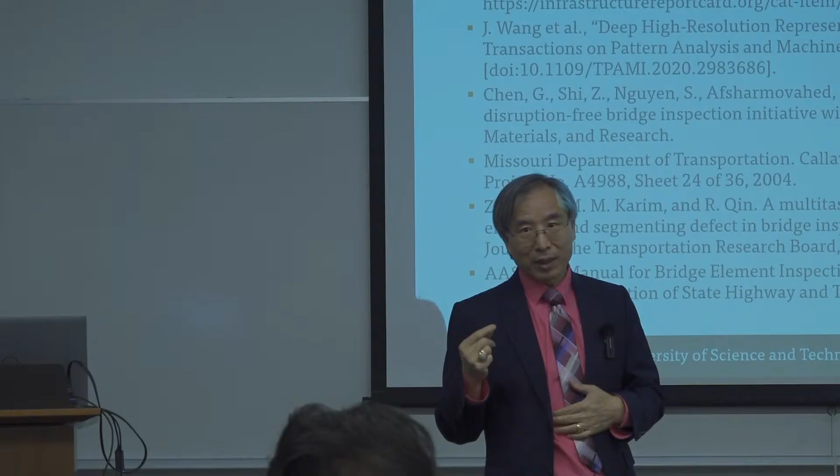Okay, awesome. Now of course, in that case, you cannot send that crawler with a magnetic crawler. But there is also another type of crawler based on vacuum. Yeah, you can use suction, do that. On the personal level, our UTC actually developed that one also with the City College of New York. But in my personal opinion, in the future I'm not developing the crawler further for concrete structures.

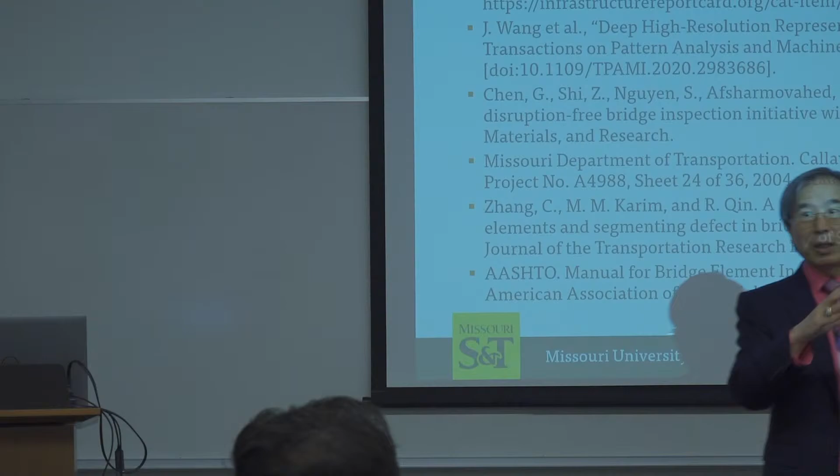Because you know the difference between concrete structure and steel structure? Concrete usually deals with large surface area. Yes, that's where you use concrete most efficiently. If you have a complex geometry like a steel girder, it's not efficient using concrete anyway. You hardly see that complexity like a steel girder for a concrete girder. So if I'm dealing with a concrete girder, I find it's a lot more efficient just using the drone itself.

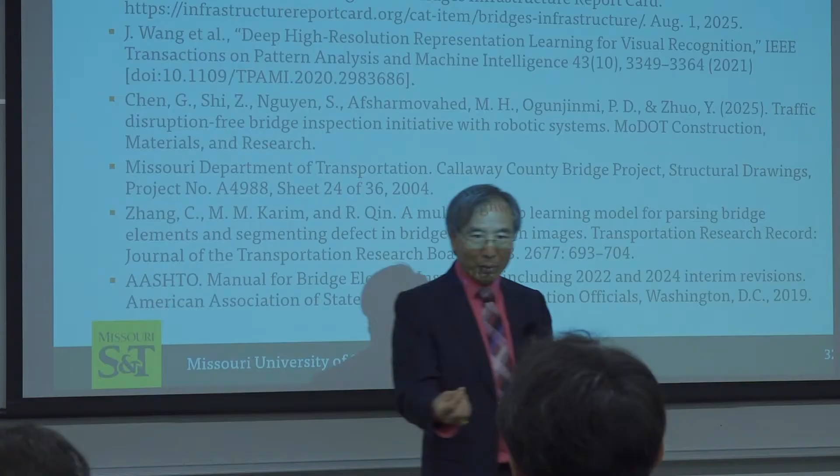We actually haven't shown you yet, we have a drone with 1 or 2 robotic arms on the drone itself. You can do interactive work on concrete surfaces more efficiently than a crawler. Because relying on vacuum to crawl on the surface of concrete is sometimes not efficient, especially if you have a void here and there. Concrete often has uneven surfaces, so it's not that efficient to manage the mechanism. It's also not so safe to make sure it stays on the surface.

That's my point, thank you. That's why I say in the future we are not developing a concrete surface crawler for that reason. Okay.

Any other questions? We are all learning from working experience. Thank you for your great presentation.

Just kind of interested in part of your presentation. You said you're going to collect the data, the 3D mesh stuff, right? You're going to do reprojections, trying to build a digital twin. Just curious, is that processing on the edge side, or are you going to do it on the server? So the one I'm presenting to you is not on an edge device. But if you want to process the digital twin on an edge device, the first thing you need to check is storage and the CPU power, GPU. Because processing for a digital twin, depending on the size of your system, takes a lot of data and storage.

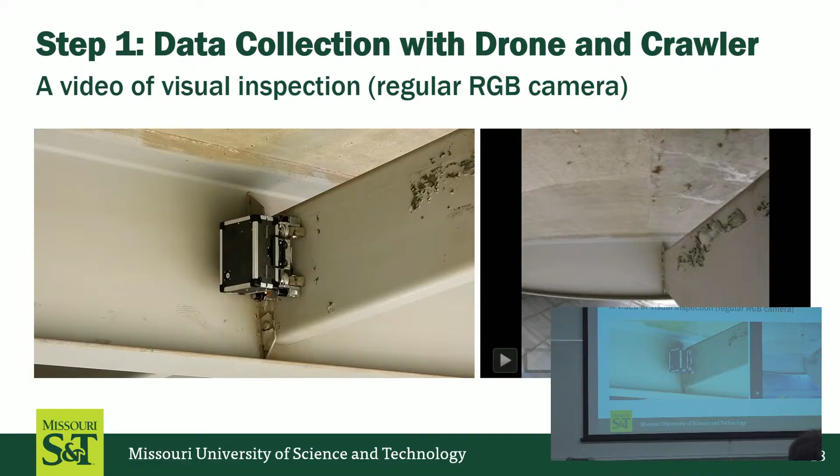I haven't included that data yet, but they build a real, as realistic as it can, full size girder for us. We have a 6 feet long, 20 inch flange width, and 1 inch thick girder. It's a good, strong girder, and they create it all realistic.

So they are asking us to develop a technique to automatically inspect the weld in the factory. The way our understanding is currently based, in that case, we're using laser profiling, not using camera view itself.

So is it doable for the realistic size of weld defect? We can pick it up using the sensing technology. It's a matter of how stable your station is to collect data. Obviously, if the station itself is moving around like a drone, it will be very challenging to make it work. But with a crawler, you can, because we can even stop to collect data. It's a perfect stable station, and that enables us to do that.

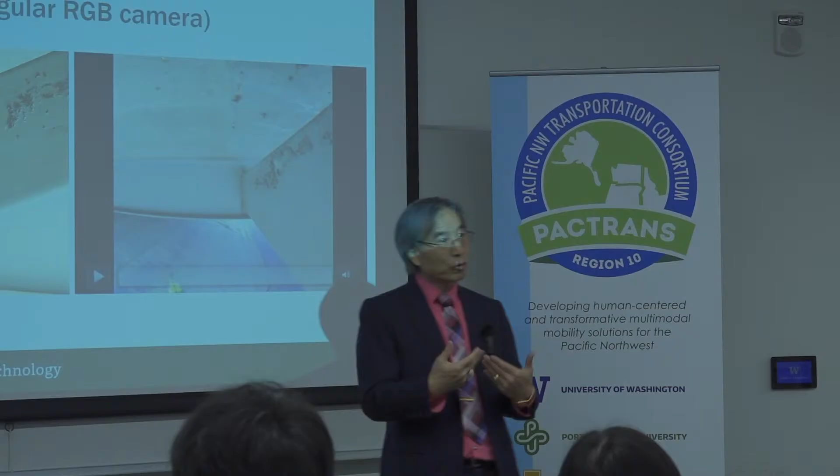For the specimen we prepare in this presentation, our technician in the department created that. We have debonding—for example, between the weld and the parent metal, you have a little bit of debonding, tiny. You cannot even see it sometimes using the eye, but if you position the camera in the right angle, you will be able to see it. And we can pick up the tiny crack, just like a real crack, because we actually add some stress to create those cracks, like a real crack.

And cavity is easy, a lot easier, because they are typically bigger. So in my view, I think it's doable with a practical problem using the current technology now on the crawler, not on the drone flying around.

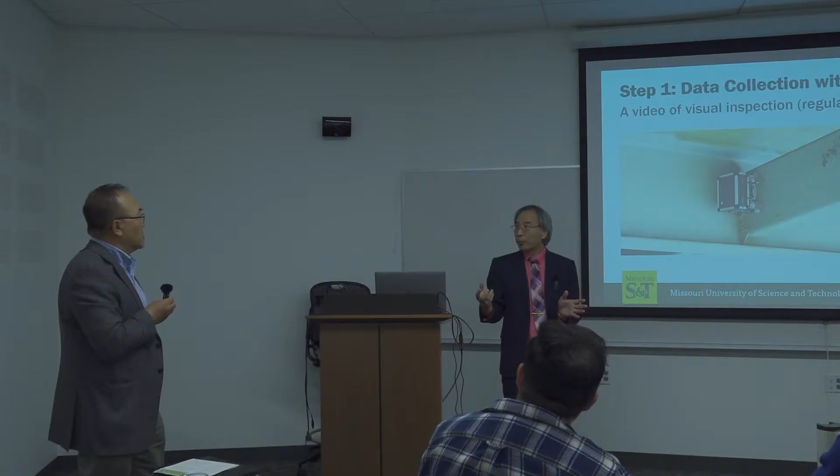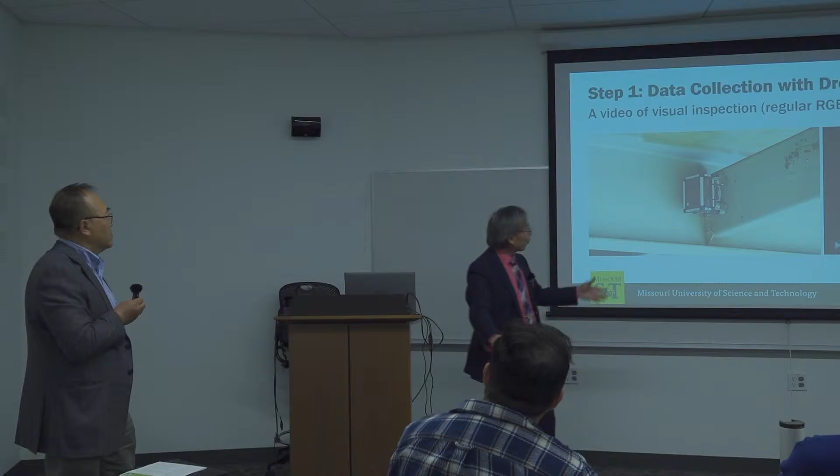So we can fly a drone using lateral connection with the girder to do the interactive activities more effectively than a crawler. Besides, crawler moving speed is a lot slower than a drone. If you have a large infrastructure, it also takes a lot of time from point A to point B. That's why our technique to relay operation from flying/traversing to crawling is effective for large scale infrastructure, because we can fly to a certain area and launch the crawler. Instead, a crawler going from A to B could take many hours, which is not practical.

So for concrete surfaces, I advise my team to go with an interactive drone instead of a crawler now, because in the first 3 years our UTC tried with that technology, although there was some success, there's still a lot of challenge. Maintaining the airstream to attach to the surface of concrete is not trivial.

That's wonderful. I definitely believe the combination of drones and crawlers is going to cover every kind of bridge. One other recommendation I can provide is that data communication is also a huge burden, right? So if you send every image back—if you do a lot of edge computing on the device, you only send the image with the potential defect. I think that will also save a lot of communication.

That's something we are moving forward on, actually. So now we have a technique where we can certainly do AI processing on the crawler itself, and then send back just critical information. You don't need to send back 2 hours of video, you just send 50 frames to the engineer. That will relieve the burden of communication.